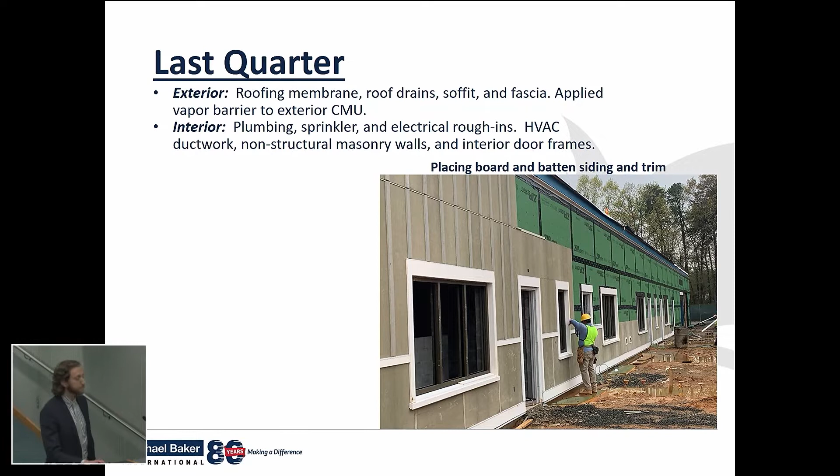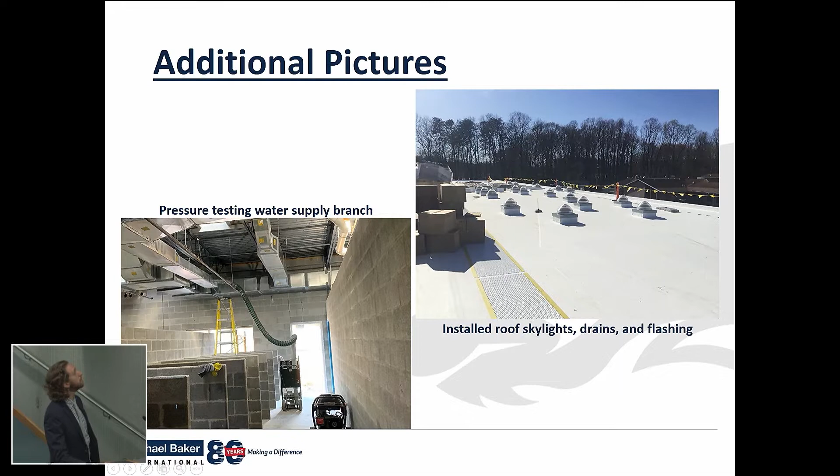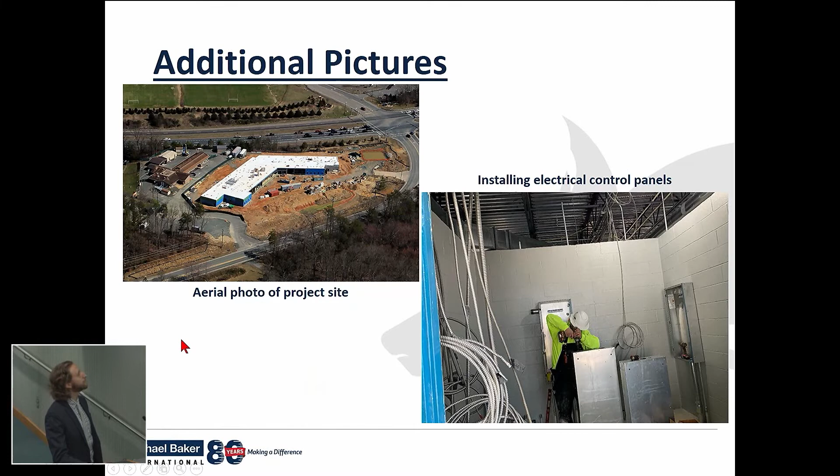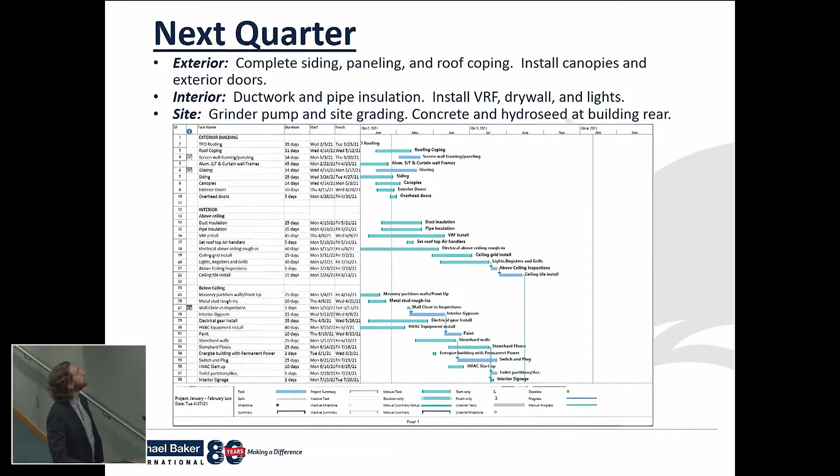Here's an overview of a lot of the milestones out through completion of the project. I'm not going to read every bullet. High-level overview, they're going to start construction of the building addition in June. And they've already started the commissioning process, they've already done a kickoff meeting. The contractor, the construction manager, the county, and the commissioner have all started that process of commissioning the facility. The plan is to start transitioning the existing facility into the new facility in October.

The remaining site work is planned in the wintertime. There are some weather-dependent activities, particularly pavement and landscaping, which have some temperature and weather requirements. So the final punch list will probably be in the spring of 2022.

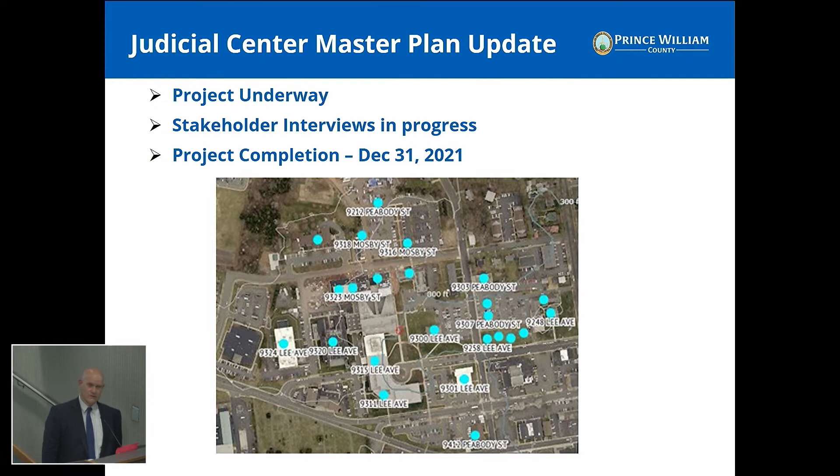We're anticipating receiving a preliminary draft of the needs assessments they've gathered in the interview process, hopefully by the end of this month. Currently we are on schedule to be complete with this process by the end of this calendar year.

The fire and rescue system facility condition assessments are in full swing. The Facilities and Fleet Management, Property Management Division has taken on the task of managing the facility condition assessment, or FCA, process. We have contracted Faithful and Gould to complete both FCAs and PEAs, which are preliminary energy use analyses, and ASHRAE, the American Society of Heating, Refrigerating, and Air Conditioning Engineers, to complete energy audits of the 22 fire and rescue system stations.

The FCA will be looking at things like the roof systems, the building exterior elements, structural systems, interior finishes, mechanical systems like HVAC, electrical, plumbing. They're looking at the fire and life safety systems, the elevator systems, accessibility compliance, and site and utilities.

The PEA and the ASHRAE Level 1 energy audits provide a preliminary energy use analysis at each property as defined by ASHRAE's procedures for commercial building energy audits. Using utility bill data provided by the county, the PEA report shall include an analysis of historic utility use, peak demand, and cost. The PEA reports also compare energy use intensity to similar buildings in the region.

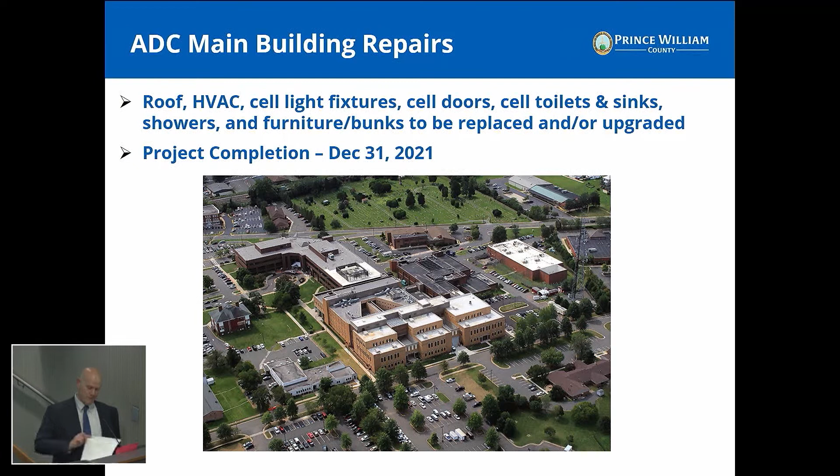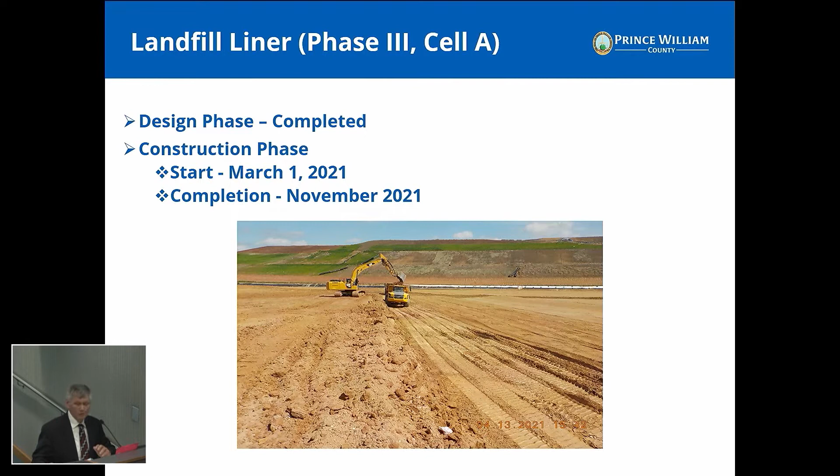I would like to highlight, again, in the solid waste program, the Eco Park, which many of you are interested in. The Eco Park is not necessarily one project; it's a series of projects to turn the landfill into various community and renewable resources. We did have a project looking at very new cutting-edge technologies to turn waste into products and energy—non-burn technologies.

We were negotiating with a company, but unfortunately due to some technology issues and funding issues, that project is not going to move forward. So we're going to start all over again. This is not untypical with these kind of projects.

These technologies are changing very rapidly, and a lot of them are coming out of Europe. So we're going to go ahead and plan on issuing a new request for proposal to see what kind of technologies are out there. This will be a partnership where we work with a private company or companies to either put in a pilot or a full-scale facility that would convert our waste either to energy or to products.

In our renewable energy, another part of our Eco Park, we are working with our partner who runs our landfill gas to energy facility. Their desire is to turn the landfill gas, which is approximately 50 to 55% methane, to what we call high quality, pipeline quality natural gas. So we call it bio-CNG or bio-natural gas, which means they could actually sell it to Washington Gas and other gas companies. Right now, because there is no gas line at the landfill, they're looking at possibly what they call a virtual pipeline, which means they would put it into trucks and then inject it into the pipeline. We are also working with them on possibly putting a fueling station in as part of this.

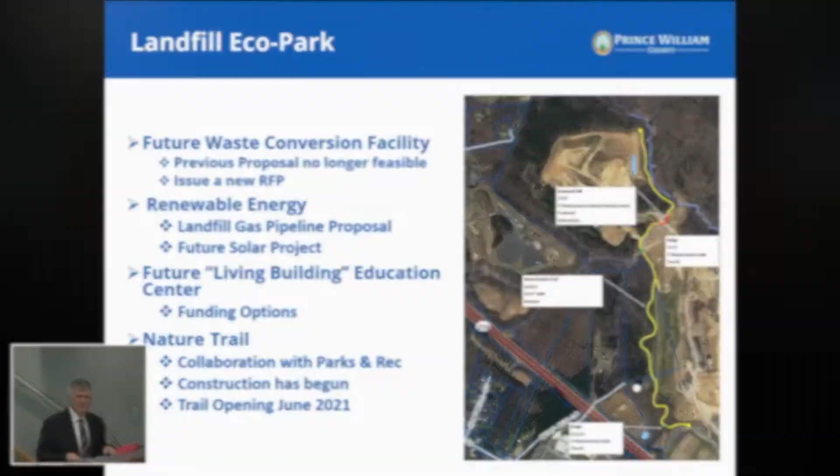Supervisor Brody: Thank you, Madam Chair. Thank you, Mr. Smith, as always, for bringing this forward to us. Obviously, as you know, several of my colleagues and I have been especially interested in the renewable energy part of what you all have been working on. To that vein, I had a couple questions.

I know in regards to the yard waste facility over at Balls Ford, you entered into a regional partnership with some of our neighboring jurisdictions. In regards to the gas pipeline proposal and the biofuels one you were talking about, is there a potential to maybe partner with some of our neighboring jurisdictions, to sell basically—us be able to partner with folks and also get revenue by taking waste from other folks and converting it into energy sources?

Right now, the landfill—this gas is being produced from the gas that's produced at the landfill. It's methane. So we don't take trash into the landfill, mainly because we want to preserve it for our future. It's pretty much a county-only facility. We do take some from the 2 cities and the 4 towns, so we're not looking to bring in trash, if I understand you correctly.

I meant the gas, as in we're already harnessing gas from the existing source. So yes, if and when we certainly hope that Fortistar, our partner, begins to produce high-quality gas and put it in a truck, we could partner with other localities if they want this gas and deliver it to them. Now, Washington Gas is very interested in this project because they want to have renewable gas in their system, and other gas companies as well. Certainly we would work with other localities if they want to utilize this gas and deliver it to them somehow.

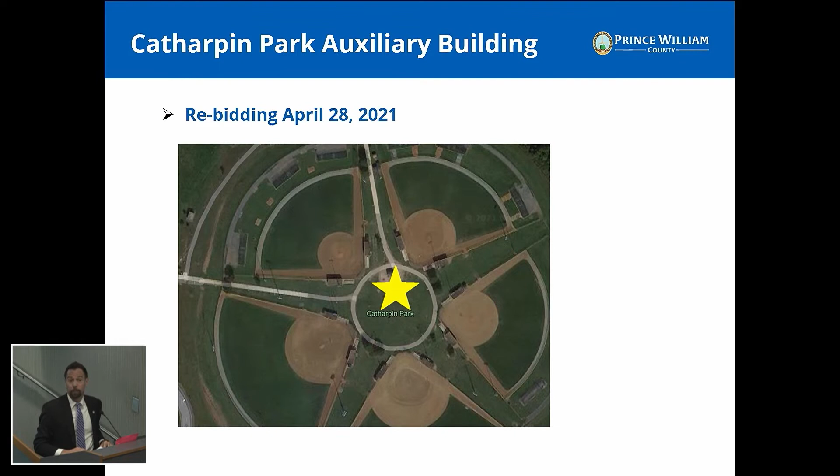The new auxiliary building at Long Park is dried in, and we're on budget and on schedule, and we're estimated to complete the project this fall.

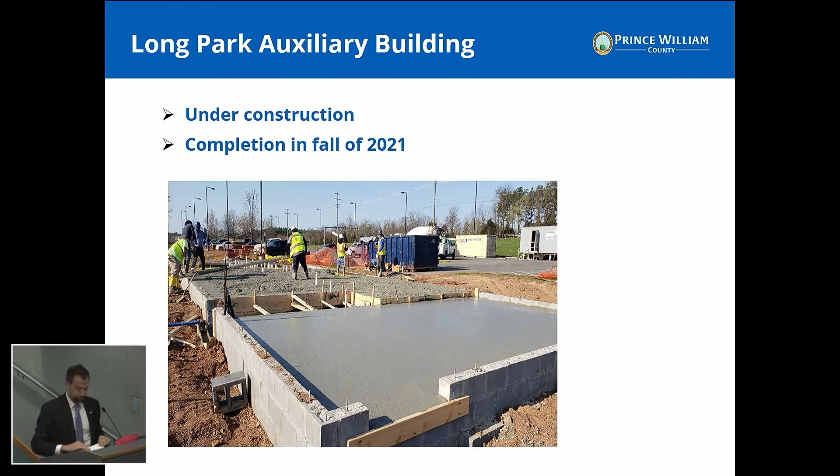Rollins Ford Park has been delayed due to a non-responsive low bidder. Unfortunately, the bidder left the playground out of their bid, and the second and third lowest bids were a little too high for our budget. So back out to the street we go. We plan on doing that in July. We hope to break ground in early fall.

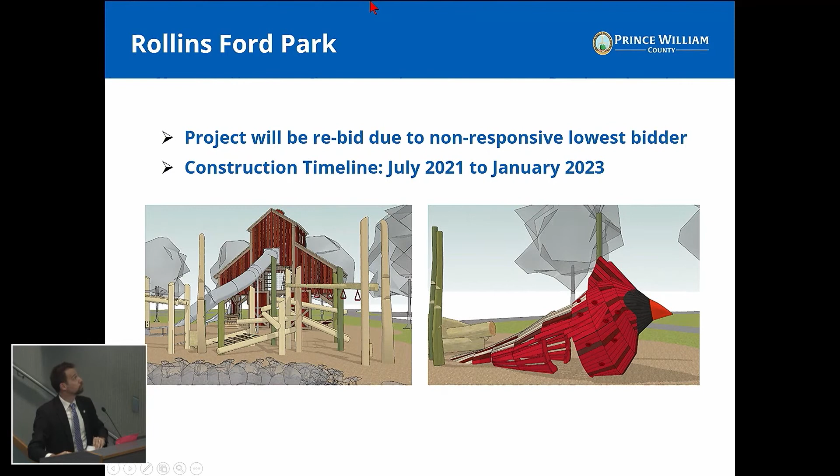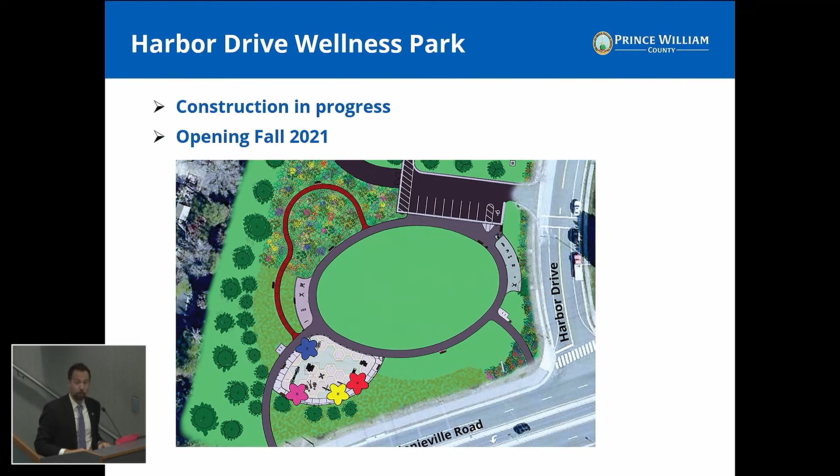The Harbor Drive Wellness Park, in healthy partnership with Kaiser Permanente, is under construction and progressing well. And we look forward to a fall 2021 ribbon cutting, so stay tuned for details for that.

The Potomac Heritage Scenic Trail Occoquan Wildlife Refuge segment is complete. It's the image you see on the slide. In addition to providing a great quality of life amenity for our citizens, this national trail is really an economic and tourism boon for the county. As a county, we really need to do our best to leverage this trail to etch and galvanize our identity as a regional recreation leader. And we have a lot to look forward to with this Potomac Heritage Scenic Trail.

As you know, one big section is the Neabsco Boardwalk, and we have some additional segments we're going to try to knock out here in the coming years. The section between the Refuge and Veterans Park is slated to be completed later this spring, early summer, and we're planning to cut the ribbon on this entire segment sometime in the fall, so stay tuned for details for that.

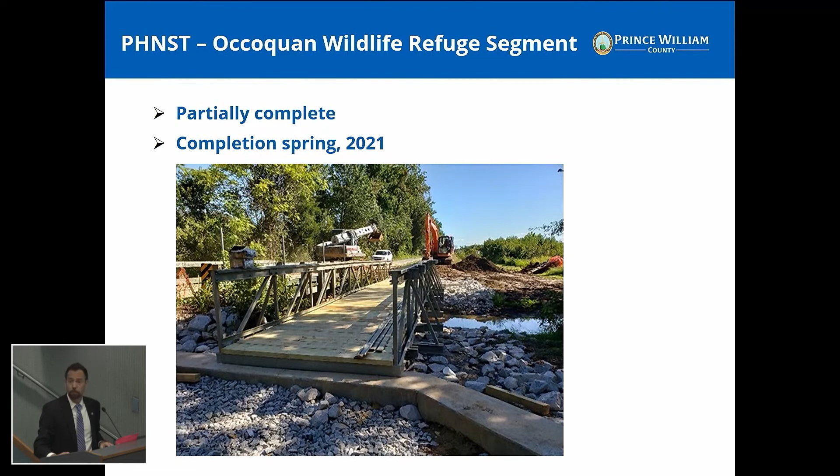The Northern Virginia Soccer Club is wrapping up construction on the new artificial turf field at Hellwig Park, and the turf replacement for Field 5, an existing turf field, has been complete. Here's an image of the new turf field. It's going to be ready for play in the next 30 to 60 days.

As a reminder, Northern Virginia Soccer Club contributed $1.1 million towards this project, and we matched it with $335,000 in proffer funding. Next fiscal year, we're planning to start design on the new artificial turf fields at Hellwig Park, at the front of the park, near 619, which were part of the 2019 bond referendum.

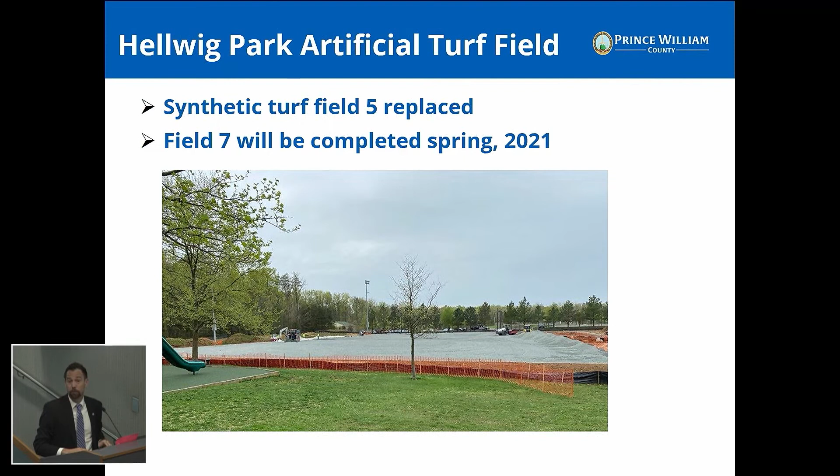Staff is making steady progress on the Occoquan Trail in the Lake Ridge community. The Lake Ridge community has been very patient with us as we've been working hard to create a first-class trail experience for our citizens, and we're grateful for their partnership.

We're currently focused on two sub-projects. The first is rerouting existing Segment 3 to make the trail more sustainable and to reduce the number of expensive bridge crossings. The second is to replace the existing bridge at segment 4. The image here in front of you is the bridge that we're going to be installing as part of segment 3. Regarding segment 3, this bridge project is in permitting right now, and we plan to bid the project this summer.

Regarding segment 4, which is the replacement bridge, the construction drawings are at 75%, and we're going to begin the permitting process this June, followed by procurement. Hopefully, we'll get that project done this fall. We think we can procure it. We can streamline the procurement for that using open contracts.

We are prepared to move on completing new segments of the Occoquan Trail, which many of the residents are very excited for. And we're going to do just that utilizing the bond funds appropriated in the fiscal year 22 budget. The segments will include the Hoos Run crossing and the connection between Clipper Drive and downtown Occoquan along Tanyard Hill Road.

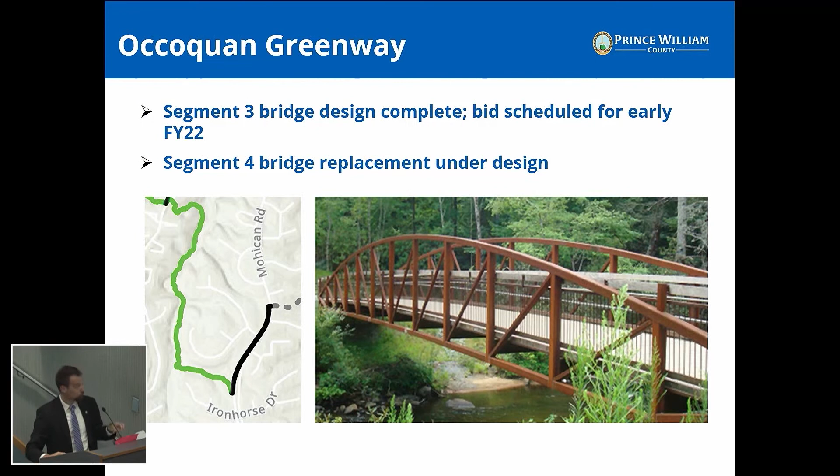As usual, we're making very good and efficient use of the Building & Facilities Program money. Here are a couple examples of projects that have utilized that funding. You can see here we're finishing the pond retrofit at Rollins Ford, doing a lot of paving. Paving isn't the sexiest of projects, but it sure does make a difference for the customers coming into our parks. They notice things like paving in a big way.